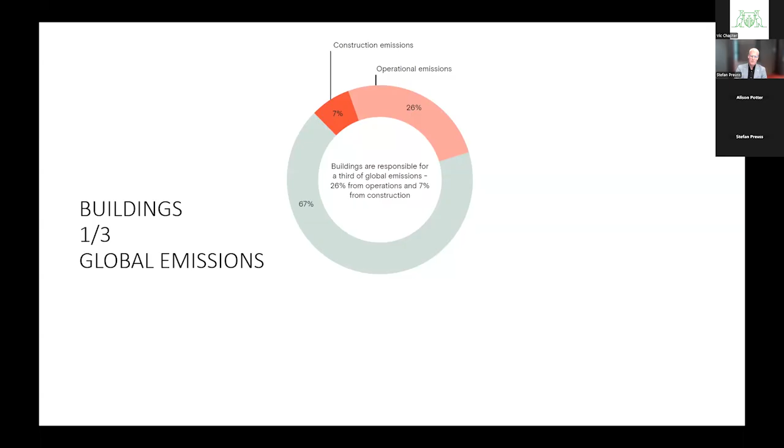Globally, buildings contribute about a third of carbon emissions. As you can see here, the majority of that currently is operational emissions from the operation of buildings, and about 7% from production and construction. However, as our electricity grid decarbonises, the proportion of embodied emissions, which sits in this red section, will relatively increase. We'll come back to that. That's really important in terms of the opportunity for architects. But let's stay with operational energy for now.

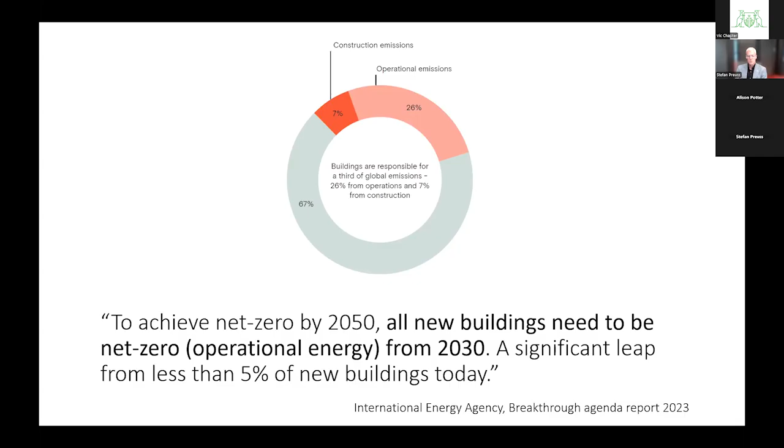The International Energy Agency states that to achieve net zero by 2050, this is global net zero of everything, all new buildings need to be net zero by 2030. That's only 5 years away. That's a significant leap from less than 5% of new buildings doing that today. In other words, within 5 years, we have to go from business as usual today to every new building globally being net zero. A net zero operational energy building is a highly efficient all-electric building that is also grid responsive, so it can help the grid transition, and is powered by renewable energy.

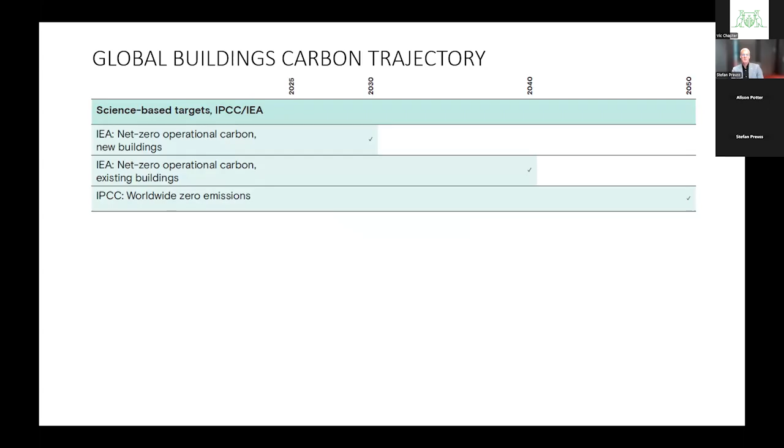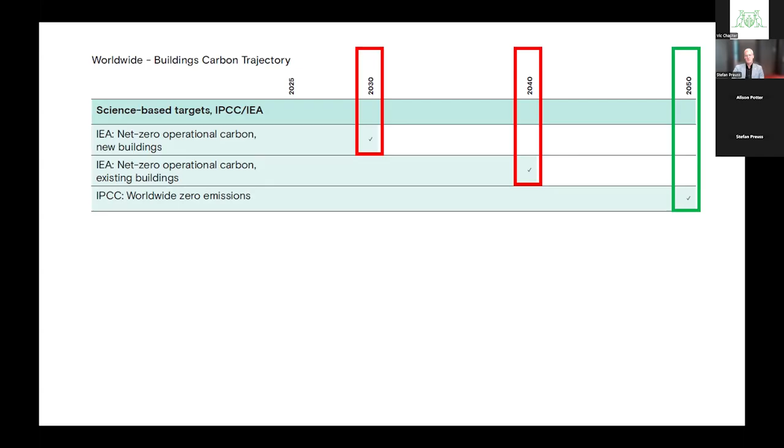We have then translated this into a policy advocacy table, a timeline on which we map, first of all, those international science targets for 2030, 2040, 2050, and then translate that into what we should all be doing. Just to reiterate, 2050 is the target, absolute net zero globally. The International Energy Agency is telling us that by 2030, all new buildings have to be net zero operational carbon. And by 2040, all buildings, including all existing buildings, have to be net zero operational carbon. That means no direct emissions from the buildings on site, but also no scope 2 emissions, meaning no emissions via the power these buildings use. That's the science on operational.

So we translated that into what policy should be in place in Australia, starting with a 2050 overall target. Very clearly, and the Victorian government, I'm proud to say, being a Victorian government employee, has a very strong agenda on exiting gas for buildings. Clearly, for two reasons. A, this is a dying technology in buildings, because we need gas to support other industries, manufacturing, travel, and so on. But the other reason is that to get to the net zero operational target, we need all buildings to be grid responsive.

So as of today, as you build buildings that might only be completed in 2030, we need to have no fossil fuels in any building today. There are some building types like hospitals that might be a bit tricky for now, but even there we are seeing the first all-electric hospitals. So no fossil fuel today in any buildings. By 2030, we need them all to be absolutely operationally net zero. That also means powered 100% by renewable energy.

To get to 2030, we have to update the National Construction Code 2028. Now, I will make some notes about this week's discussion around the productivity roundtable and how that might affect that agenda. 2040 then is all buildings. That means there's a lot of work in the upgrade of existing buildings, and that includes taking all gas, all fossil fuels out of those buildings, replacing.

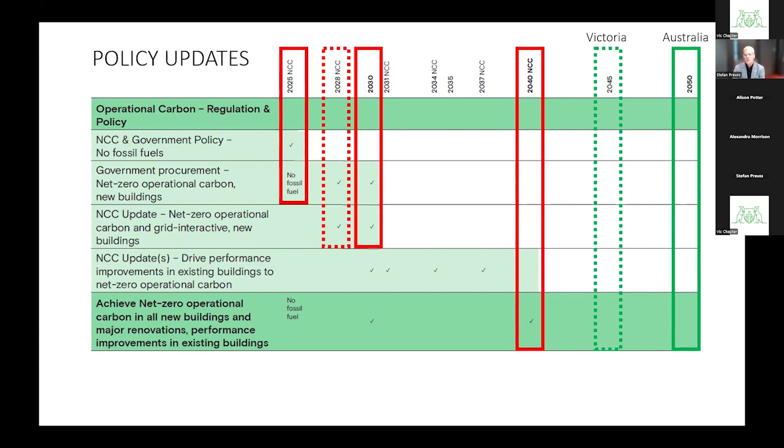But of course, for architects, the opportunity is to not just do a services upgrade, but hopefully to improve the envelope and the performance of buildings as well. So hopefully there's the opportunity for architects to engage their clients in more than just services replacement. That's just the overview of that. Just to mention that Victoria itself has an earlier total net zero target of 2045. And that's the reason why we are advocating for 2040 to be really our target on net zero.

That was operational emissions. Now let's talk about embodied carbon. Again, the end goal is clear, but how do we get there? We now have nationally agreed tools for how we measure embodied carbon. Today, a new building that's being built will typically have half of its emissions in embodied carbon and half of its life cycle emissions in operational carbon. But as the grid decarbonizes, the embodied carbon part will increase, which means architects, as the designers and specifiers, along with engineers, have the greatest opportunity to reduce carbon in new buildings.

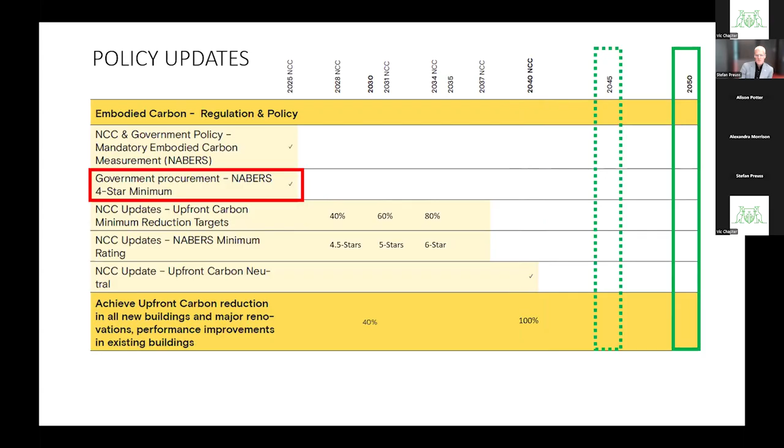Because we now have a new nationally agreed tool, which is called NABERS Embodied Carbon, we should all strive to do the basics and at least get to a 4-star minimum embodied carbon rating. We've put government procurement here as a leader. Then basically it's a journey from there to zero: 40% by 2030 and then 100% by 2040. That's a very ambitious target. It's a difficult target. But once you see what we're doing, and assuming that the manufacturing industry will decarbonize itself, that's a journey. So just to summarize, use NABERS Embodied Carbon from today, try to get to 4-star minimum.

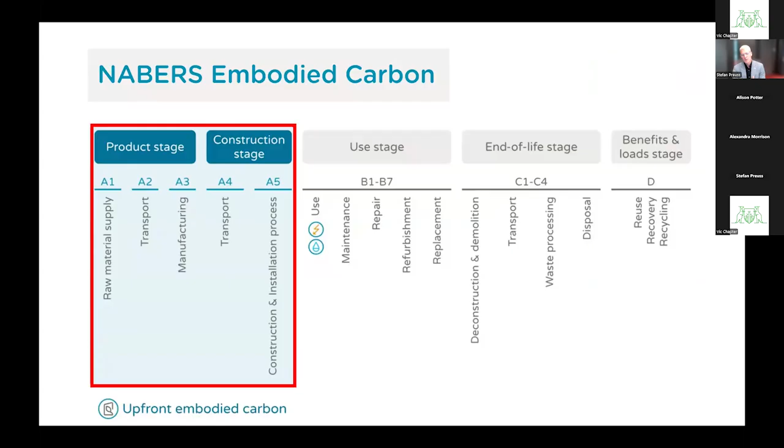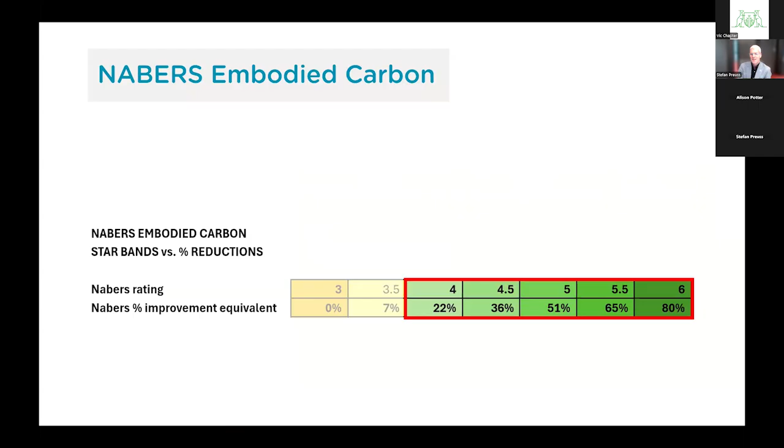Importantly, NABERS Embodied Carbon only measures the product and construction stage, not full life cycle. And at the moment, only structure, services, and facade. So working with those disciplines will be critical. I promised you it would be very technical, but we'll have much nicer slides coming up. So just to be a bit technical, a 4-star NABERS embodied carbon rating means the equivalent of a 22% reduction, or roughly a 20% reduction of embodied carbon versus business as usual. Sounds easy, is actually harder than you think, but that's what we should be doing right now in every architecture practice on every project.

So with that, what do we do now? I said I would do some notes. As you might have heard, there's tremendous pressure on the National Construction Code. It is seen by some as a productivity hinderer. So this week, literally, the productivity roundtable run by the Commonwealth is investigating whether the NCC should actually be continued in its current form as we know it. So that trajectory that we advocated for may be a bit in the air. In other words, we cannot really wait for regulation to do its part. My understanding is that the NCC as a whole may be reviewed as a document and how it regulates, but we clearly have to act now. And on that note, I'm handing over to my colleague Alison, who will run us through the playbook of the plan, which is the guidance of what architects can do now.

Excellent. Thanks, Stefan. And bear with me while I bring up my screen. Okay. So can everyone see my screen there? Yes. Great. Excellent.

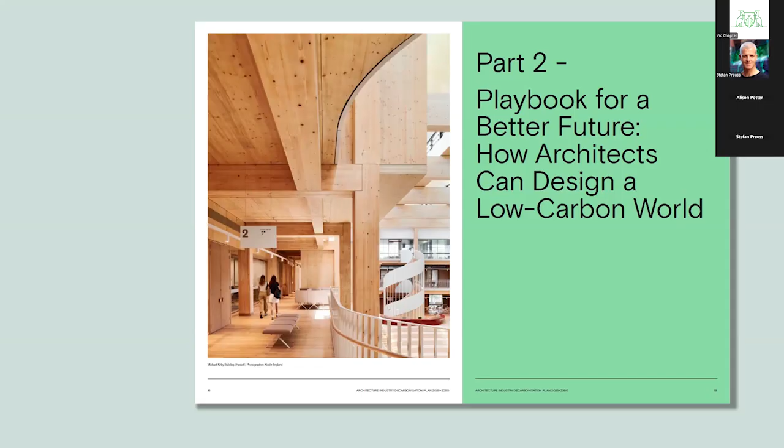Okay. Can everyone see that slide, Ange? Yes, we can. Thank you. Great.

So as architects, we're in a unique position. We don't just design buildings, but we also shape the way that people live, connect, and care for the planet. The playbook really attempts to recognise this. It's not about ticking boxes or compliance. It's about staying relevant and preparing for the future of practice. And across Australia, we're already seeing really inspiring leadership. Big firms, small studios, many of us are really finding new ways to reduce carbon and rethink design.

What the playbook offers is a shared platform to learn from each other, to spark innovation, and really importantly, to create a common language for climate action, clear metrics, open conversations, and a shared ambition of how we'll be able to track our progress and move forward together. So ultimately, this is about architects leading the way, not just as designers, but as change makers.

We know the urgency, climate change, rapid urbanisation, and shifting client expectations, meaning that sustainability is not really optional. As we acknowledge, architects are well placed to lead this transformation because our influence really spans the entire process, from setting briefs that prioritise sustainability to specifying low carbon systems and materials to optimising performance with passive design and renewables, and to shaping greener and more resilient communities.

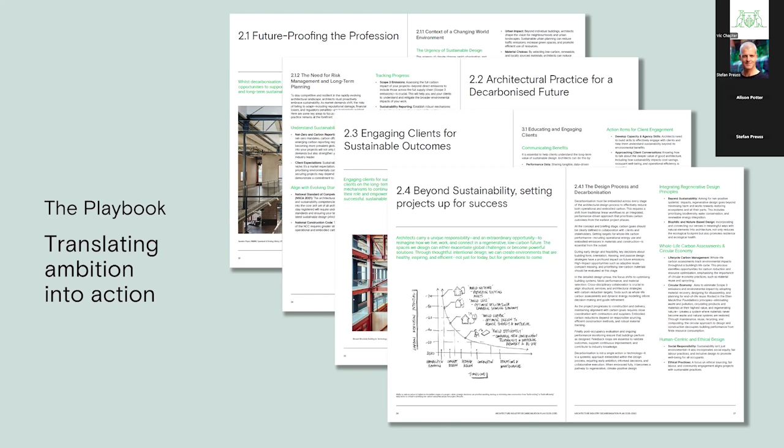So to stay relevant within this rapidly shifting industry, we need to rethink how we embed sustainability in our practice culture, use digital tools to track impact, and better align with the goals and the needs of our clients and communities. But I believe collectively we do have the creativity, the influence, and the tools to design not only sustainable buildings, but sustainable business models.

So one of the first challenges is clarity, and that I think was very clearly highlighted by Stefan earlier. But really fundamentally, what do we mean by net zero, carbon neutral, or climate positive? So the playbook helps us navigate these definitions and align them with phases of the decarbonisation trajectory. For those who haven't yet, I strongly recommend exploring the Embodied Carbon Curriculum, which is available on the Institute's website. It's a really excellent foundation in terminology, measurement, and practical application.

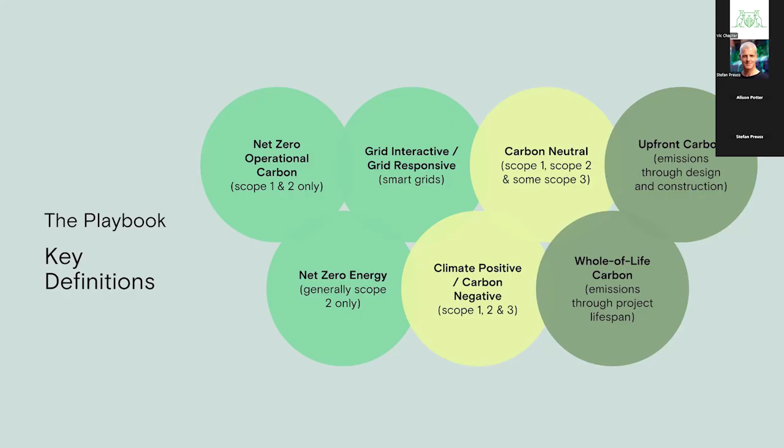The Institute is really focused on supporting the whole profession, not just large firms who may be already active in this space and have systems in place, but smaller practices who need clear, accessible pathways. Rather than thinking about the never-ending list of tools and compliance standards out there, I thought it's helpful first to understand our carbon impact in two really clear ways.

The first is our practice operations. So this is how we run our studios day to day and take accountability as organisations. Becoming carbon neutral certified is one way that your practices can demonstrate that we have our own houses in order. Architects Declare have excellent templates for setting up your sustainability action plans, and B Corp provides global recognition of your practices' commitments to high social and environmental standards.

The second, and where we have the most impact, is through our design services. This is where energy modelling, embodied carbon assessment, and circularity strategies come into play. Whilst these typically sit in our scope 3 emissions, and are often owned by our clients, so to speak, they really do represent the greatest opportunity to reduce carbon at scale. So we really encourage practices here to create systems enabling them to track their own scope 3 influence emissions as a way of being able to demonstrate how they offer value back to their client, as well as being able to track and showcase your achievements.

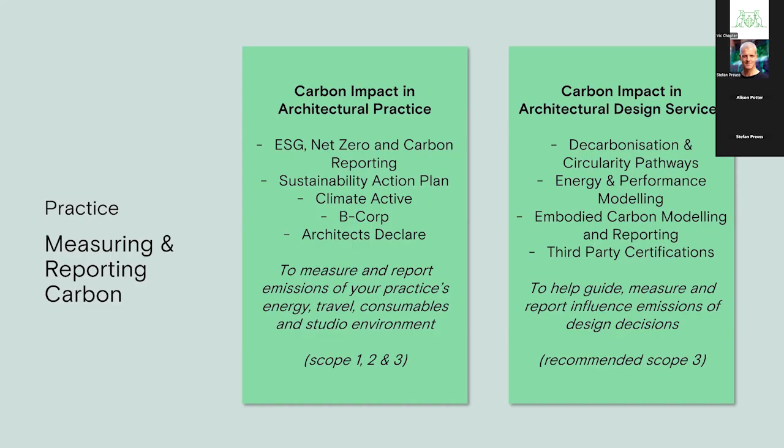But I think it's really important to clarify that decarbonisation really isn't a single action or implementation of technology. It really is the mindset that we embed from the very beginning of the project.

So as architects, our greatest influence lies in the earliest decisions we can make, questioning whether to build at all, reusing what already exists, and choosing materials that support circularity and long-term value. So these choices, form, site orientation, and structure, can lock in the biggest carbon impacts before a sketch is even drawn.

As the project progresses, opportunities for deep carbon reductions narrow. That's why we set whole of life carbon goals from the very first briefing and guide each stage with tools like carbon assessments and performance modelling.

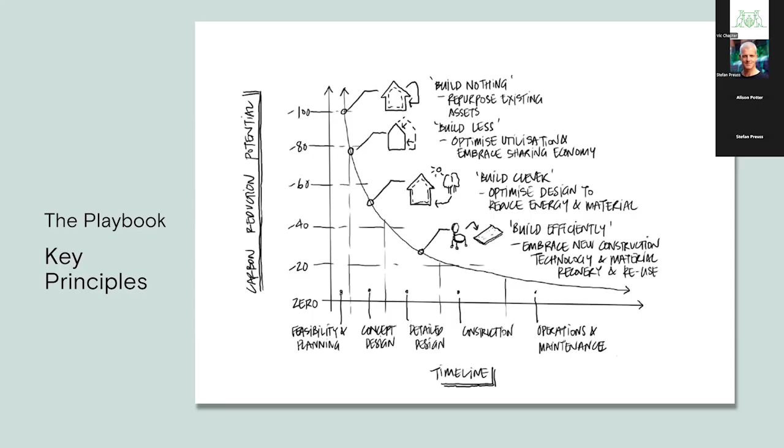So one of the first case studies we highlighted is Sydney's Quay Quarter Tower by 3XN and BVN, which is the global benchmark for radical reuse. So instead of demolishing the existing building, the design team retained 65% of the existing structure and over 98% of the core. And that decision alone saved more than 12,000 tonnes of embodied carbon in concrete.

The redevelopment doubled the floor area and occupancy, and through some clever design and engineering, it became the world's tallest upcycled skyscraper. Its vertical village concept, stacked volumes, central atria, and interconnecting staircases reinvent high-rise design for social connection and daylight amenity. So this project showcases how radical reuse delivers massive carbon savings whilst achieving world-class design and recognition.

So this project prioritised circularity using salvage timber, upcycled cladding, and red list-free materials to enable the diversion of over 90% of construction waste from landfill and achieving upfront emissions around a third lower than typical benchmarks. Arup also committed to renewable energy offsetting all upfront emissions and are currently in the process of ILFI certification for the project. So again, this project demonstrates how regenerative design can be embedded even in small projects through material choices and really the culture of the team and how they collaborated together.

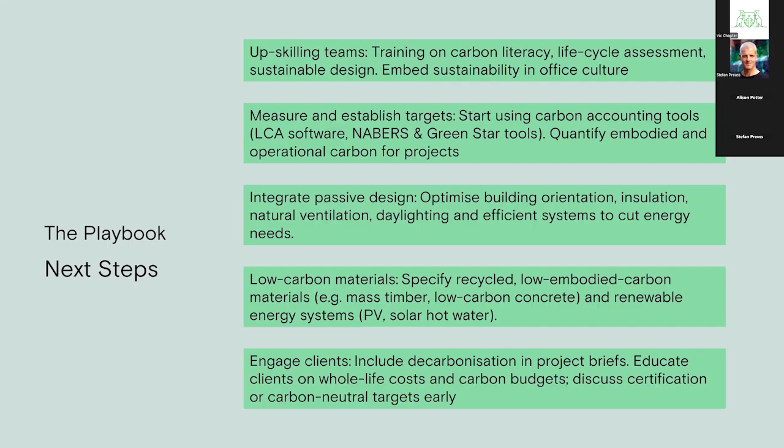So if we commit to these steps, we not only can align with the decarbonisation plan, but we can also position our profession as leaders in shaping a resilient, regenerative future. So the playbook really is here to guide us, but the real change comes from all of us. How we design, how we run our businesses, and how we collaborate as a profession. And I think together we can transform our industry into one that is carbon neutral, regenerative, and future ready.

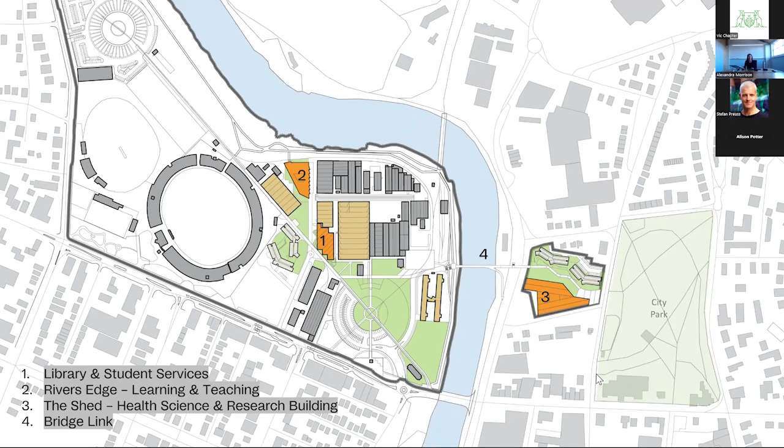2 of the 3 buildings achieved over 30% reduction in upfront embodied carbon, and that was compared to a reference building of the time. And today I'll be sharing our holistic approach to achieving these carbon reduction targets by using one of the case studies, River's Edge, which was a learning and teaching building completed in 2023.

So here I'll take you to the site of Inveresk. It is a place of many layers of cultural significance. It's a historic railway yard, which also holds Indigenous cultural significance. And it's been used as a sporting and arts, tertiary education and recreational precinct for the people of Launceston. Its position, you can see, is nestled into this bend of the North Esk River, which sits on the periphery of the city, which is to the top left of the page.

The site has this legacy of industrial architecture of the 19th century railway industry. So for us, it was important to consider the built form and the character of these university buildings. We did ask ourselves, how do you reinvent the identity of a new university that's effectively scattered within an existing precinct of heritage buildings and non-university functions? And importantly, what does that look like?

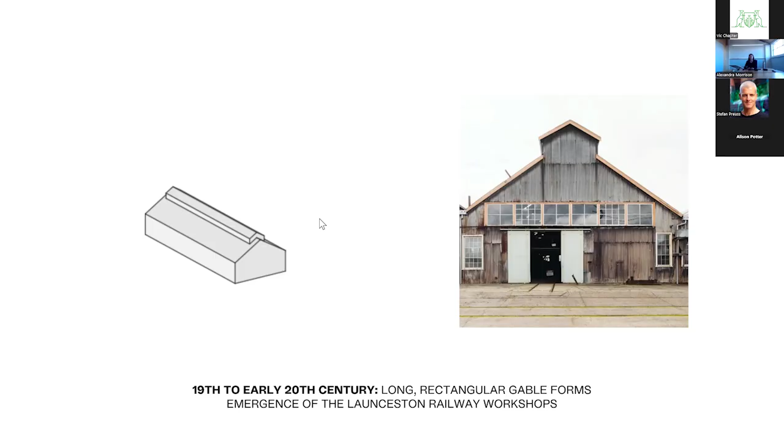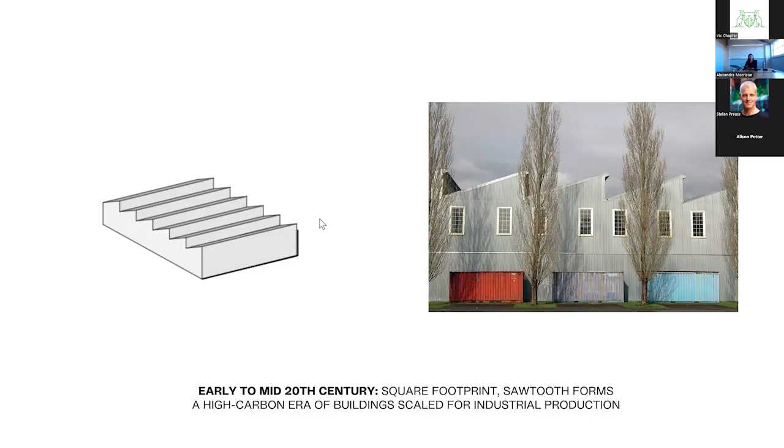I guess our starting point was to draw upon the evolution of archetypes already within the precinct. Here, the long extruded gable forms of railway workshop buildings built in the late 19th to early 20th century, coupled with the large square footprint of the sawtooth roof forms that were built in the early to mid 20th century. These structures were built in a high carbon era and they were scaled for industrial production.

Projecting forward, though, to a low carbon future of the 21st century, the 3 new building designs were to represent a contemporary style, and they take on these hybrid forms within the heritage precinct. Each one adapted and responded to their unique site conditions, which were often infill sites with awkward site forms. And it is through this new architectural language that the university can then emerge from its industrial setting and promote this low carbon future.

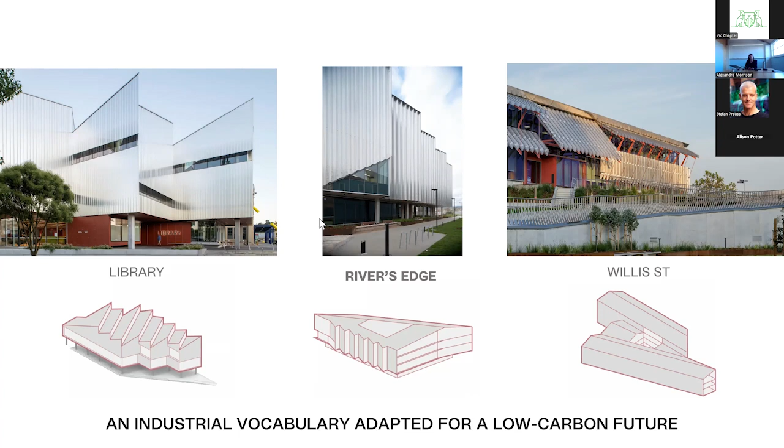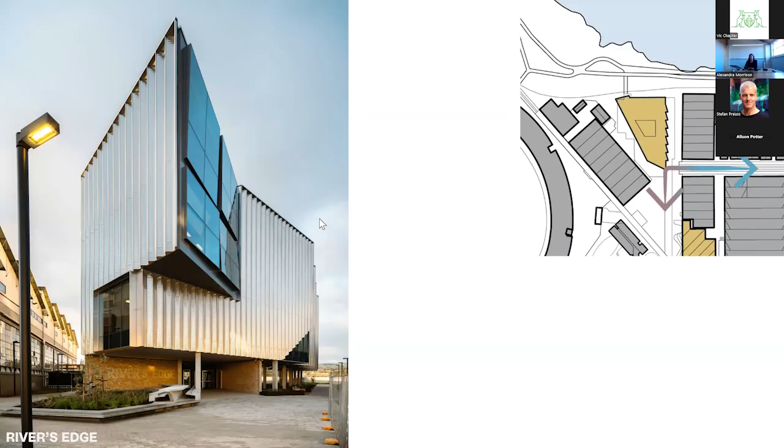And here, the built outcome of the River's Edge Learning and Teaching building. You see the 4-pane window looking down Traversa Lane, which acts as this navigational marker and offers a glimpse inside the new function of the precinct. And it does put education and learning on show. And here, the building's shifting silhouettes. They provide different vantage points from within the precinct, which add intrigue, and they also draw the passerby in.

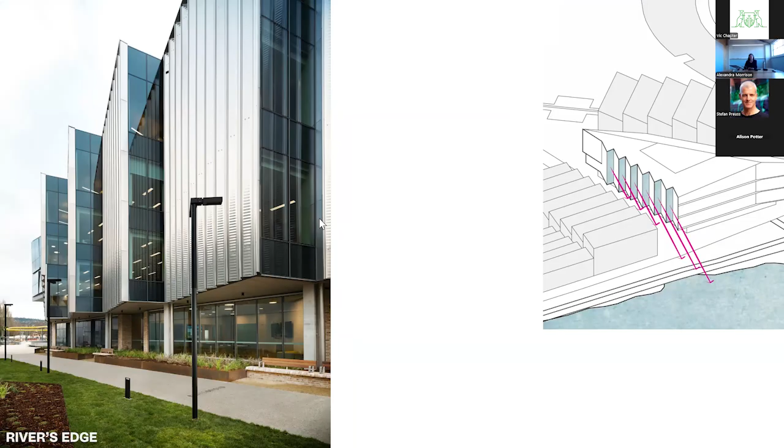Inverted sawtooth roofs here have been scaled for habitation as they become window portals. And the window portals direct deep views outwards to the surrounding hills beyond the river. And here, revealing itself fully along the North Esk River with full panoramic shaded glazing windows. You can see now the building really asserts itself with this new identity, and it projects this idea of a learning institution that's kind of revitalised the former industrial precinct and brought it into a new low-carbon 21st century.

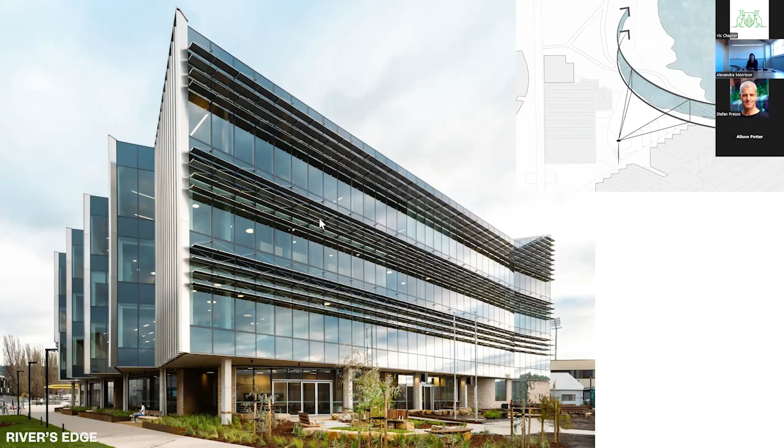Hydro, to give you a bit of context, the story about hydro has really shaped a Tasmanian identity, and today it's this legacy that really gives Tasmania a distinct advantage over the other states in Australia. It's powered substantially by renewable hydroelectricity, and having a clean energy profile then shifts the focus of building design in Tasmania. So with operational emissions being low as a starting point, we found that the University of Tasmania could then prioritise reducing embodied carbon. So it's really a great example of how state policy and energy profiles can actively shape how we approach design. They can also inform the clients and influence sustainable outcomes.

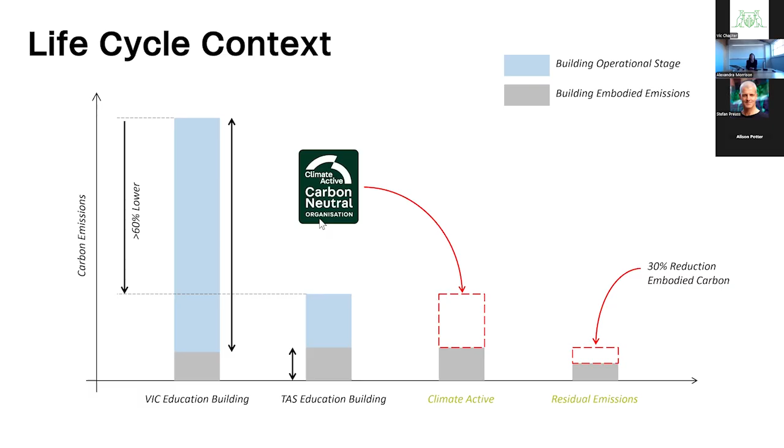So this then pushed the conversation forward, and it was beyond just managing energy use to something more like considering embodied carbon and the design choices that lower emissions from day one of building design. It was from this point that ambitious targets of 30% reduction in embodied carbon were set under the stewardship of Vice-Chancellor Rufus Black. So how did we approach these ambitious targets?

Our first step was to quantify and to develop systems that isolate and measure materials, which becomes quite crucial. And we found Revit to be a useful tool for this assessment. By measuring, we quickly started to understand where the greatest impact of our materials choices was coming from. And evidently that's in the superstructure, facades and foundations. And these are the areas where you can also find the biggest opportunities for carbon reductions.

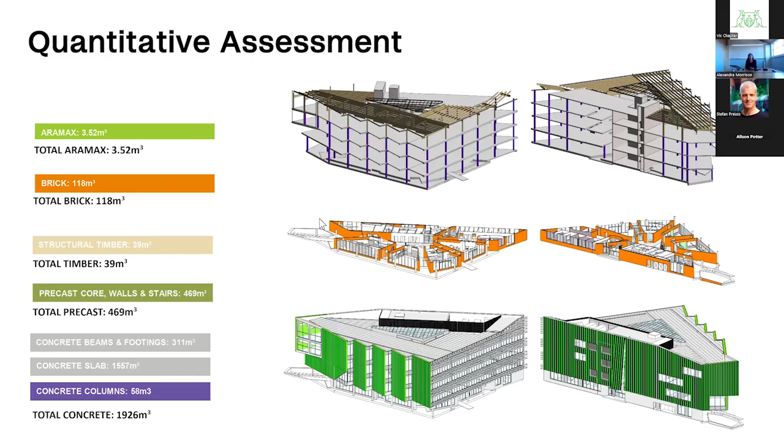The next important step, we'd say, is to conduct a materials research exercise and to track the information. Developing a process that really allows for early adoption of materials research and tracking of the whole life carbon factors of our materials choices really is critical. And to do this, we adopted a materials matrix, we're calling it. And this allowed us to input our research on materials, compare the pros and cons of all the relevant factors, so not just carbon as a factor. And this information was then used to inform our material selections, as well as feed back directly into our design decisions.

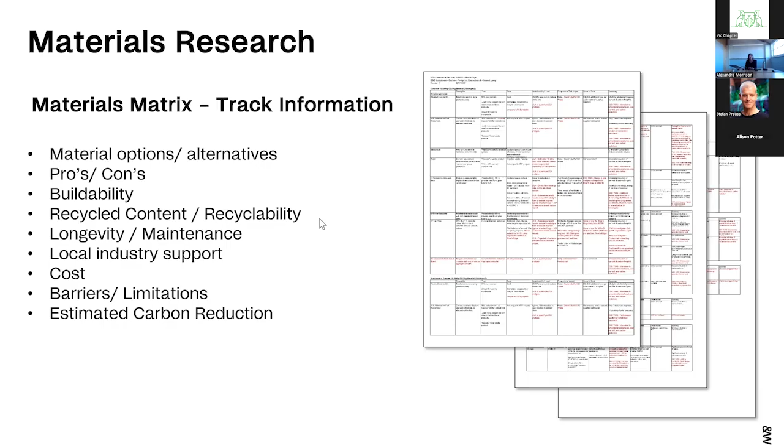The ESD engineer then helped manage the process with all the data and information. They took the material selections and our quantity takeoffs, and they put it into a life cycle assessment so it could then start our comparative assessment of embodied carbon on the project.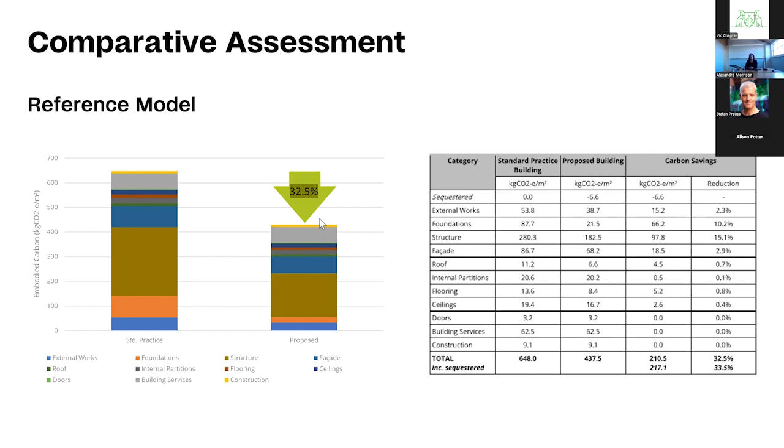And it's through the life cycle assessment reporting that we found the process to be one of continuous review and reassessment across all the phases of design and construction. And this is critical to ensuring that your carbon savings are incorporated for the whole length of the project.

We also found that the process required a much higher level of earlier consultant coordination and also an earlier contractor collaboration process. For example, we held workshops with the civil and structural engineers during the design phase to optimise the structural design to see if we could incorporate savings through design in that way.

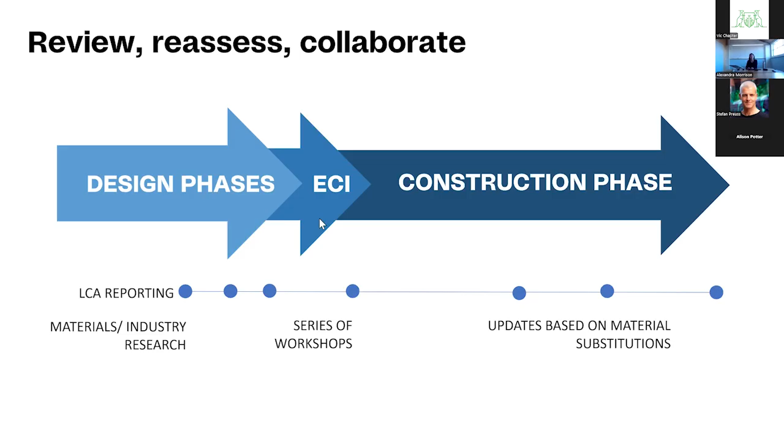And we also ran an early contractor involvement phase before the construction phase, and this was to assess procurement issues and seek industry feedback as an additional check on our own research on materials.

But through this process and having all this technical data, we actually found new ways to innovate with materials. For example, this Aramax aluminium sheet profile, typically used for large spanning roofs, was used instead as a monolithic cladding system. It was informed by our design. The material reflects the industrial character of the historic Inveresk site, but it was also chosen for its durable, low maintenance, economic and local manufacturing benefits as well.

We were initially sceptical of the carbon footprint of aluminium, but the product is absurdly paper thin. It's only 1.2 mil thick, and its profile, which is designed with structural spanning capacity, actually attributed to less secondary steel framing than a conventional steel-clad building. And as a result, the carbon assessment really revealed a much smaller upfront impact, and it allowed us to reconsider the product based on its whole of life carbon benefits. So an interesting study.

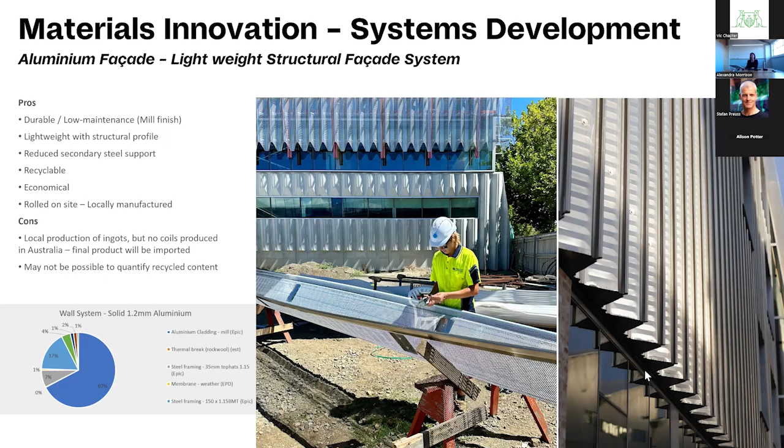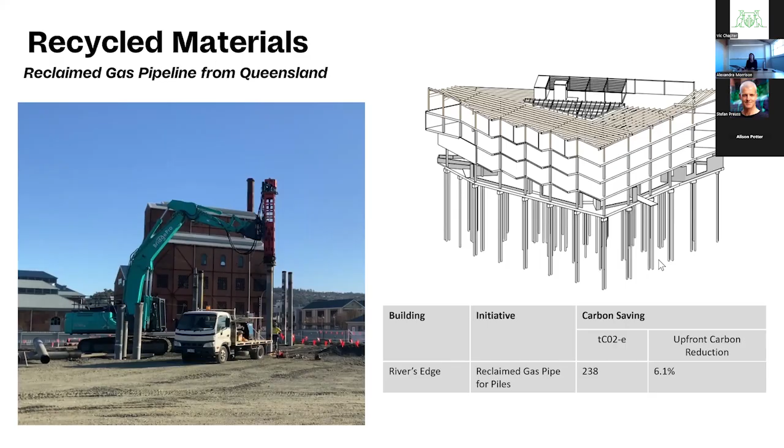The process also allowed for project-wide collaboration and interesting solutions to be discovered. For example, here, the UTAS project managers went out and found, secured and supplied the contractor with disused steel gas pipelines from Queensland. And these were used as foundation piles for 2 of the 3 buildings. This is pretty significant because the buildings are really designed in a swamp-like condition. And this meant that 77 concrete piles that were required to be 18 metres long could effectively be substituted with these repurposed gas piles. And they contributed to significant carbon savings.

Then there were instances where material substitutions probably didn't go as planned during the construction phase. Low carbon Envisia concrete contributed to the most carbon reductions on the project, as it was used for the superstructure of all the floors and the columns, and attributed to almost 14% savings.

But we did run into trouble during the construction phase when Boral released their ready-mix concrete EPDs for Tasmania. And they actually showed less carbon reduction savings than previously advised during the design phase. So we had to engage directly with Boral to understand why this was the case. They explained that they use different concrete mixes for winter and summer in Tasmania, and this was to deal with the different ambient temperatures affecting curing times and workability.

So we then had to work with the contractor to understand construction sequencing and understand when the winter mix would come into play. And after a reassessment of the life cycle analysis with the consultant team, fortunately, the project was still able to meet its embodied carbon targets by using 32% of a winter mix in the end.

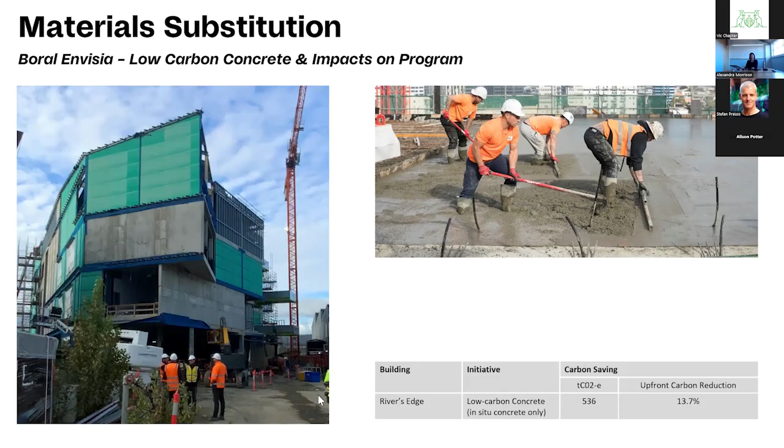Industry-wide collaboration and finding local solutions was quite pivotal to this project because it was funded by government. We engaged with local suppliers and manufacturers directly in the Tasmanian timber industry to find locally manufactured solutions for the CLT stair, for instance, and for all interiors and timber-lined floors, ceilings and walls, and also joinery installations.

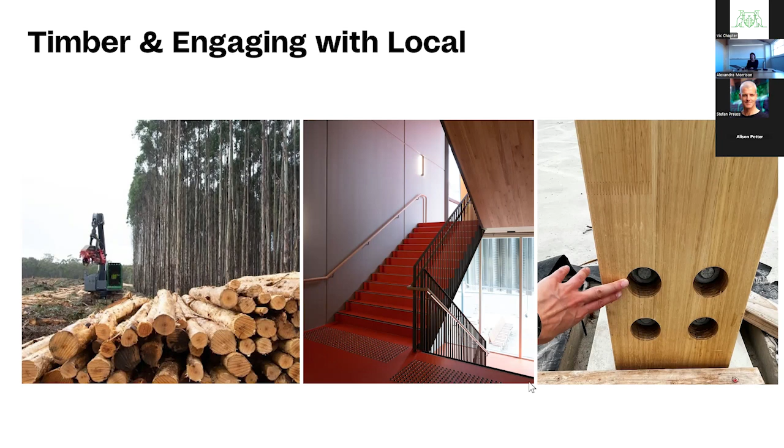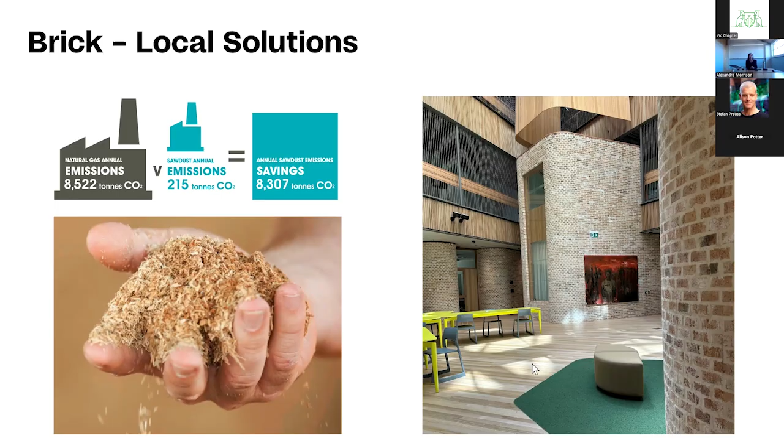And then on our materials research journey, we stumbled across some local solutions with low carbon benefits. Here we sourced carbon neutral bricks from Austral Bricks Longford plant, and they were used to articulate these curved learning and teaching pods on the ground floor. Austral Bricks was the first brick manufacturing plant to achieve carbon neutral status, and it does so in part by using sawdust waste from the local Tasmanian timber industry, and they use that as biofuel.

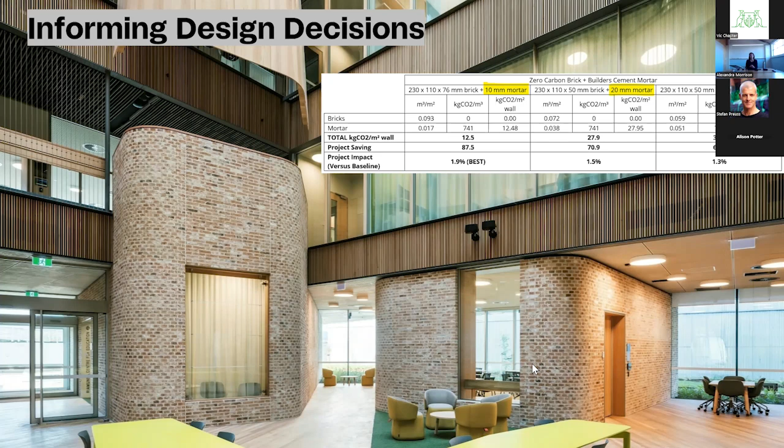The subsequent carbon assessment for the brick revealed some surprising results, and it's compelled us to actually make some design changes as a result of having this technical data and information. We realised the specification of carbon neutral bricks exposed the impact of the cement mortar joints in bricklaying. So the original design intent was to incorporate this thickened slopped mortar joint with up to 32 mil wide joints. But after revealing the impact of this upfront embodied carbon, we then reduced it to a standard 10 mil joint.

So these were just a few stories and lessons learned from our embodied carbon journey, I guess you could say, on these projects. But we can attribute the overall success of the projects on having a team that was working towards some common values. First one being stewardship from a forward-thinking client. They did set a really ambitious goal, but they also gave the project team agency to innovate, and they backed non-conventional approaches.

Secondly, there was also a very systematic approach to decarbonisation through design, and this was adopted by the whole project team. And finally, there was this shared commitment across the project team and the construction team towards achieving the project's ambitious sustainability objectives, as well as achieving design excellence in that outcome as well.

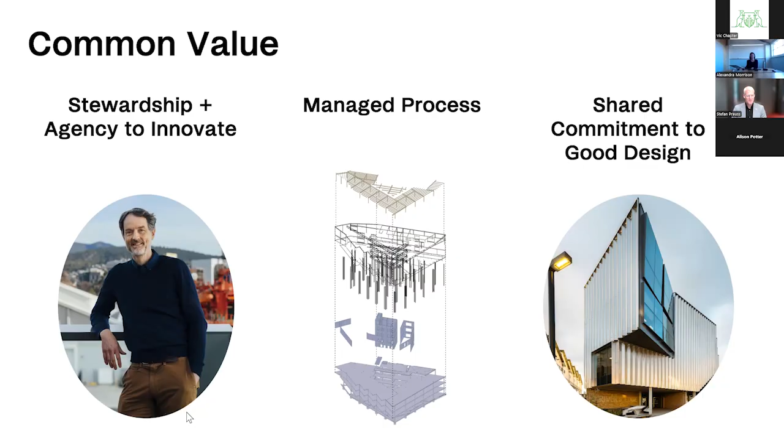So that was it for me. Thank you. Fantastic, Alex. I can hear the buzz somewhere in the universe. That's fantastic. We're even on time, surprisingly, despite the technical difficulties. And we'll now get on with some questions and answers. I'll kick us off, and maybe you can unshare. Alison, if you could turn your camera on, that would be fabulous. Thank you so much.

So Alison, Alex had a fantastic client, right? The client as a champion, as we all love to have them. What can architects do to influence clients who are not quite there or who don't know what they're missing? I think that's a really great question, and it's something that I think we all come across every day in our projects. And I would say being able to highlight the benefit back. And I think that's something that we really wanted to focus on in the decarb plan. Part of the importance of sharing these case study projects across all scales and all typologies is that it's really about the process.

We have to acknowledge that some buildings, as you mentioned, are going to be more challenging to decarbonise, and we're going to have different levels of influence on them. But I would say being upfront and really having those conversations early is really critical to finding the opportunities that resonate with the client. So it's really what value they have, what are their drivers, being able to have that conversation around aligning some of those fundamental core drivers of the project. But I would say also there's a lot to do with passive design.